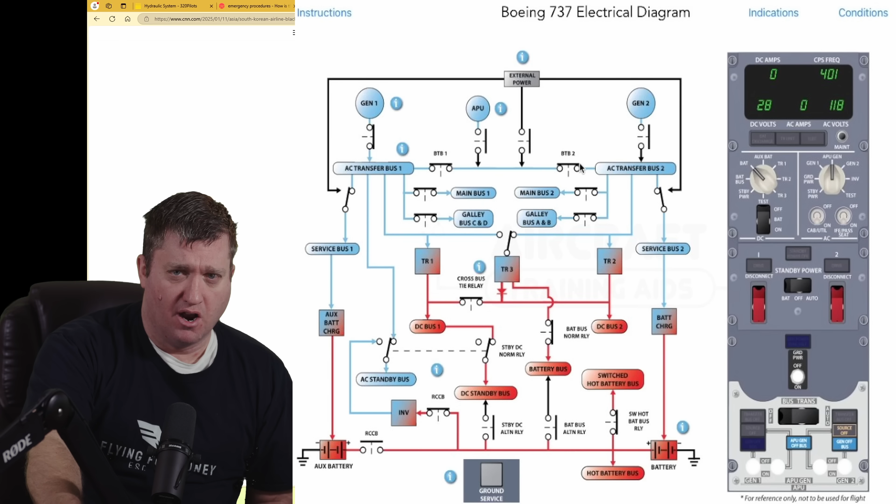We have pretty good video evidence that the number 2 engine, the right-hand engine, continued to function. We see it belching flames on video from the ground as the aircraft passed overhead, which would indicate a compressor stall - it would mean the engine was functioning but damaged. Then we see a heat bloom coming out of the exhaust. It's grainy video, but you can definitely see heat haze coming from the exhaust as the aircraft flares for touchdown.

As it skids down the runway, we can see the number 2 thrust reverser cowling is open, and you can hear sounds similar to a thrust reverser actually functioning and providing some reverse thrust. The question is how much thrust was coming out of that engine - probably limited. When you have compressor stalls, those are high power situations, and the response to a compressor stall is to reduce thrust until you stop having them. So they had limited thrust capability on that engine.

I said this in the previous video I posted on this: if you lose an engine, you lose 50% of total thrust, which is pretty obvious and explainable. But you lose 80% of performance, meaning you only have 20% of performance on a single engine, because you experience a lot of drag. You experience form drag, just the air hitting the frame of the aircraft, and induced drag, which is produced by generating lift. At slower airspeeds, induced drag can be pretty high - it's drag that the wings produce to keep the aircraft aloft. A good portion of engine thrust just goes to combating that, and you have a portion left over that goes to performance. On 1 engine, you have about 20% of the performance you'd have under 2 engines to climb or maintain altitude.

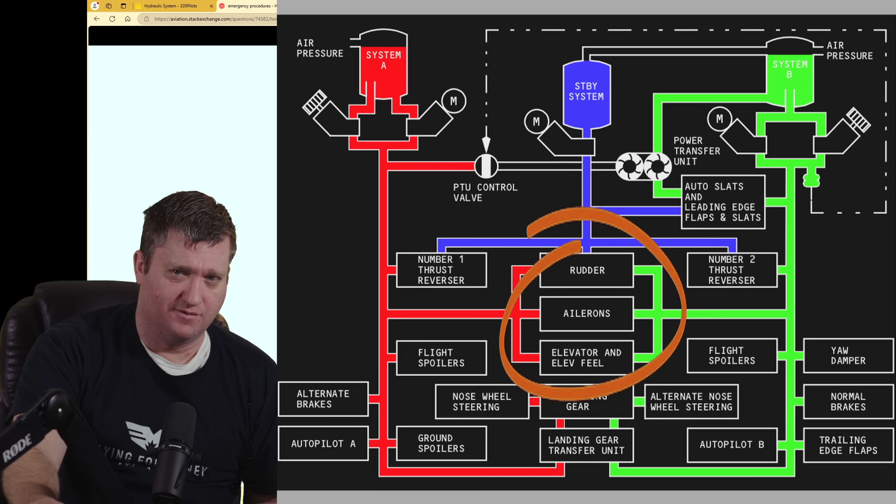That will give you hydraulic power to the flight controls: the ailerons, which allow you to bank the aircraft; the elevator, which allows you to pitch the aircraft to control altitude; and then the rudder, which allows you to maintain orientation of the aircraft through the yaw axis. So it's going to provide all of that, plus a few other systems.

It does not provide hydraulic source for normal gear extension, which would be via the gear handle in the aircraft, and normal flap extension, which would be via the flap handle.

Now, the Airbus is a little bit simpler. It's a little bit newer aircraft, a little bit more technologically advanced. So the crew could extend the flaps using the normal flap handle. The gear extension would be similar in the Airbus as it is in the Boeing, where you have to open up the panel, pull some stuff, and then it just releases the up locks.

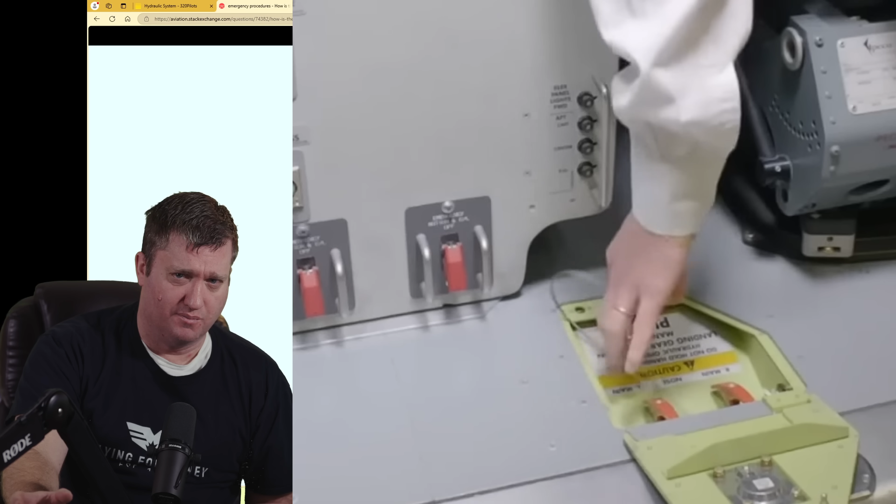It evacuates hydraulics from the system so the hydraulics don't keep it trapped in the up position, and then gravity does the rest - it free falls. So it'd be a very similar process in the Airbus. But this is a description of the Airbus component.

You have the RAT here, electric pump, blue hydraulic system. So in an electrical emergency, the electric pump stops producing power, the RAT produces power, and then that goes into the various systems. The main difference functionally, operationally, between the Airbus and the 737 is that the 737 has a switch above the captain - it's directly above, kind of back a little bit from the captain.

There's two switches. One activates the alternate flap system, and the other controls that. There's a red guarded switch - you flip the guard up, put it into the arm position, and the switch right next to it you push down, and it'll extend the flaps via an electrical motor for the flaps, through standby hydraulics for the leading edge flaps, the slats. It extends both of those. The slats are extended - you can't retract them after they're extended using that system. The flaps can be extended or retracted, but it takes a while - it's a slow rate.

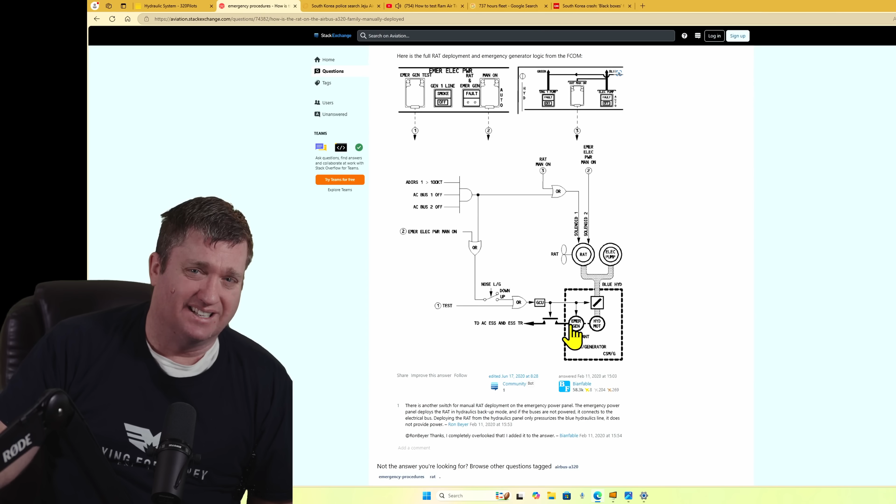Airbus is similar, although you'd use a normal flap handle, which you use every single approach. So it makes it a little bit simpler for pilots, a little bit more normal. You just do what you do on a normal flight and it'll work - just at a slower rate.

In the 737, if you're not immediately familiar with that system - and the alternate flap system is a type of system that pilots are trained in mostly just once, in initial training. When they do the initial type rating on the aircraft, they're going to touch that switch, manipulate it, and then they're probably never going to touch it again. So depending on how much experience or how many years the pilots have in the aircraft, it may have been a couple, 3, 4, 5 years since they utilized that system, so they're not going to be thinking about it. That could explain why the flaps weren't extended.

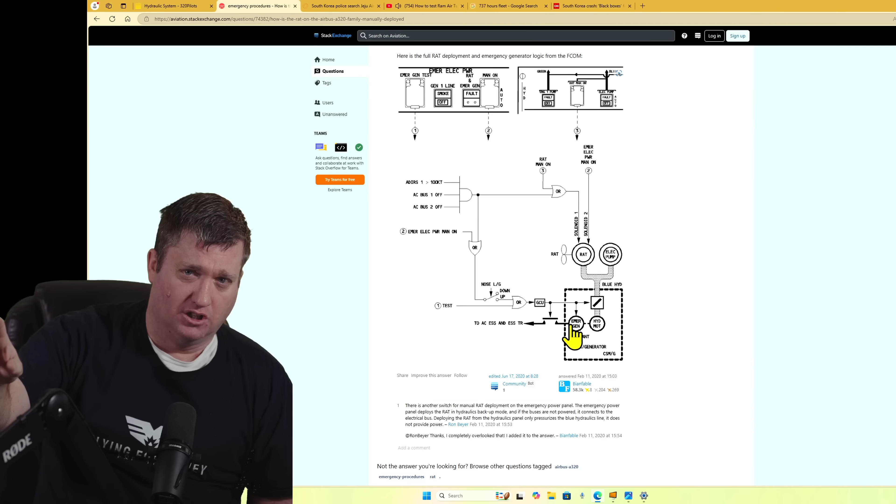You can also attempt to extend via the flap handle. But unless you're paying attention to a small gauge that shows flap position, in a high workload situation where you're trying to glide to the airport, you may not realize that you're not getting any flaps out.

One of the interesting things we should talk about is the length of time here - about 20 seconds from when this began, and about 15 or 20 seconds from the time they started the go around to the time the recording stopped.

In a go around, you say 'go around, toga, flaps 15.' You tell the guy you're going around, push the toga button, which brings the throttles up. You say flaps 15, you retract to flaps 15 - the pilot monitoring does that. Then the pilot monitoring will say positive rate, gear up, and they'll put the gear up.

So if you have about 20 seconds from the time they initiated the go around to the time they had the ultimate electrical failure, you would get the gear up in that period of time. You might be able to get most of the flaps up. It's hard to tell in the video as the aircraft skids by whether it has a small amount of flaps out or the flaps are totally retracted. It seems like it would have been difficult to retract the flaps all the way in that period of time, but maybe they did - maybe they had a little bit of flaps on that landing, and it's just difficult to see because they didn't have much.

When did the bird strike occur? I think it occurred probably 15 or 20 seconds before the total electrical failure. At that point you have engines spinning down, with damage to the number 2 engine. It should have been able to maintain idle - if you can't maintain idle thrust on an engine, the computers that control the fuel supply will generally shut the engine down. We can see it looks like they had at least idle thrust when they were flaring and landing and skidding, and the thrust reversers were out on the number 2 engine.

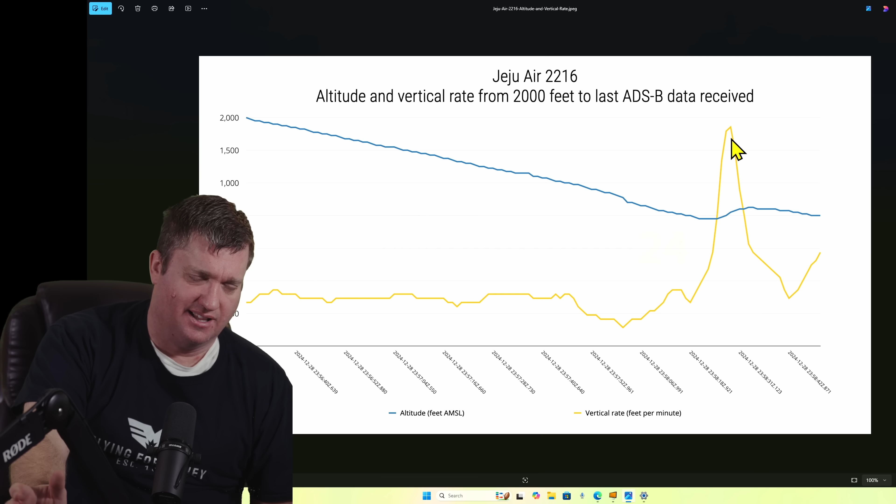The second part of this is how much of this is a Boeing issue versus an Airbus issue. If this had been an Airbus going through the exact same situation, the A320 and 737 are very precise competitors for the exact same market. The Airbus is a bit newer, designed in the late 70s, early 80s. The 737 was designed in the late 60s into the early 70s, but has a lot of components from the 727, which was designed in the late 50s. The overhead panel is basically a shrunk-down flight engineer's panel from the 727, so a lot of the architecture from a human factors standpoint comes from late 1950s technology, about 70-year-old human factors tech.

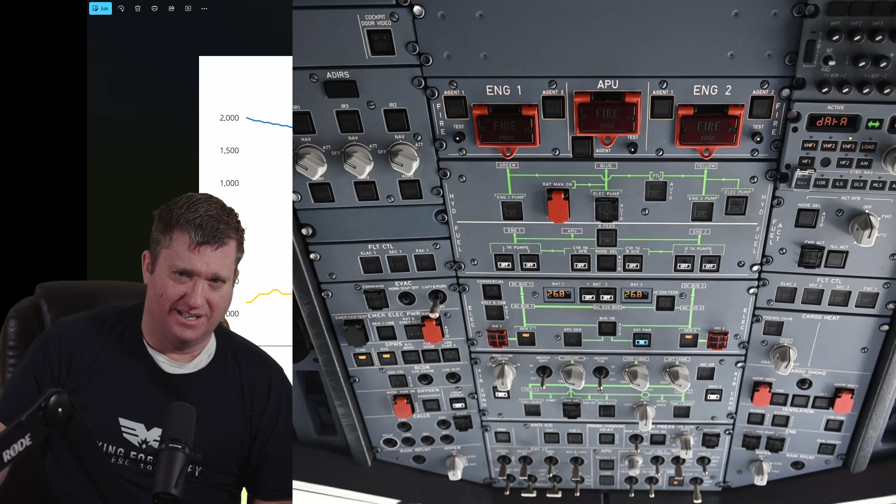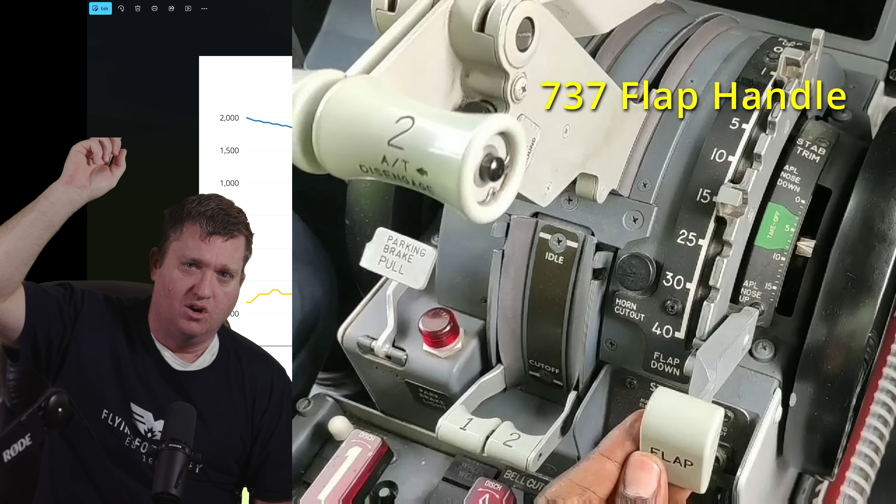The Airbus is a little easier to fly as a result, but I don't think it would have made much difference if this had been an Airbus instead of the 737. Sure, they would have had an easier time getting flaps, if they were asking for flap extensions. We won't know if they did, since we don't have the CVR, but if they were trying to extend flaps through the normal flap handle, not realizing they needed the alternate because of the electrical emergency, my guess is 95% of Boeing pilots wouldn't have been thinking about that either. It's a very small percentage of Boeing pilots who'd be thinking, hey, I'm in an electrical emergency, I need the alternate flap extension.

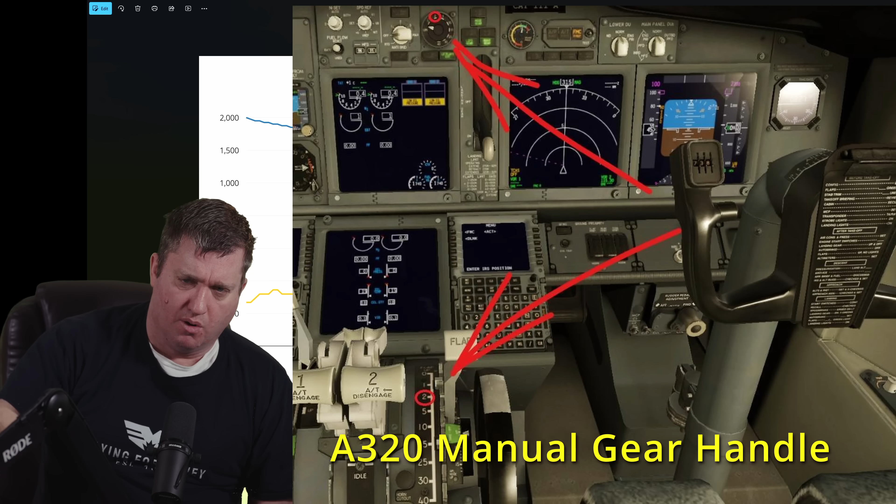So you ask for flaps, extend flaps. There's a small gauge you're probably not paying much attention to because you've got life and death stuff going on in front of you. So they may have been attempting to extend the flaps and just not been able to. In the Airbus, those flaps would have extended because they run off the normal system, even though it's a standby pump operating it, similar to the Boeing. But the normal flap selector would actually extend the flaps.

The landing gear would be the same on the Airbus as the 737, unless you knew in an electrical emergency that normal extension wouldn't work, you wouldn't immediately go to manual gear extension. So they probably would have bellied in, maybe a little slower since the flaps would have been out. I don't know how much that would have helped, they'd have bled off some airspeed, but they were going at such a rate, they could have been 60 knots slower going off the end of the runway and the outcome probably would have been pretty much the same.